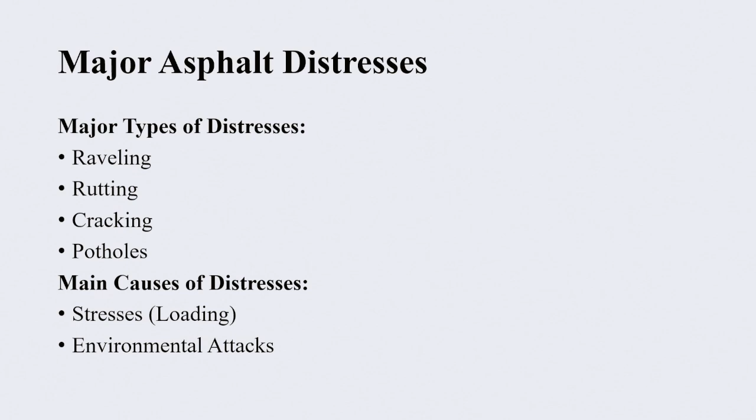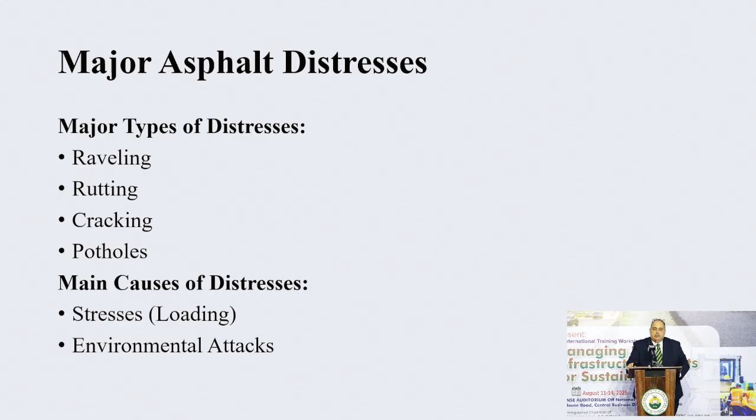It is regarding the parameters impacting our roadway network conditions. So I consider this to be as two presentations in one, so please follow up with me and pay a lot of attention. I will be a little speedy in here because I'm first presenting some of the major distresses that are facing our roadway network, and then I'll talk about the major causes of these distresses. Then I will present how to form a team to assess our metrics, like risk assessment basically, and try to come up with what we call definitions for vulnerability and resilience for our road network.

Do you hear me clearly, or there is like some... I'm not sure what is the source of this noise, but

So first comes, there is a lot of these distresses that could impact the condition of our roadway network. I have taught this class in multiple countries. I've made this training. I spoke with Ministry of Transportation employees, whether talking about my state, North Carolina, or the federal government and Turner Fairbank in McLean, Virginia, in the United States, or through the Ministry of Transportation in Kingdom of Saudi Arabia, or RTA, Roads and Transport Authority in Dubai, Ministry of Transportation in Egypt, MOCA, or Ministry of Construction and Housing in Iraq, and Ministry of Transportation in Bahrain.

We kind of brainstormed what are the main problems. And I asked everyone to give me a list of 3. Basically, they came up with a list of 4. These are what we're gonna see on the board, starting with raveling. So basically, raveling is everywhere across the globe. It could be a localized or a widespread raveling. Both are happening for the same reason. The only difference is time and level of traffic. Once raveling starts as localized, give it some time, some more traffic, hot weather, sun rays, and it will start to widespread, so convert from the left-hand side to the right-hand side picture.

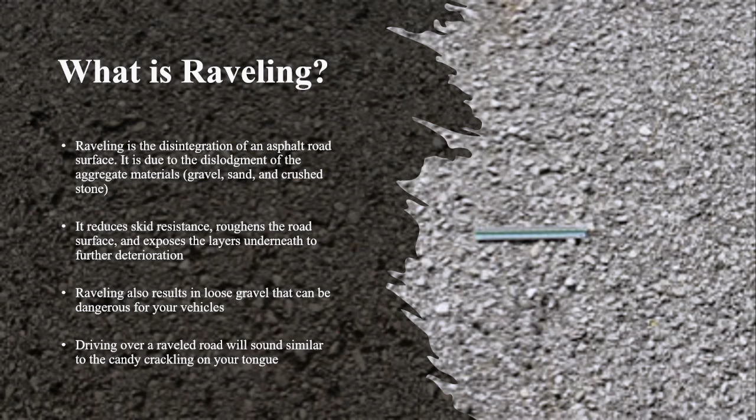However, with time, with use, with sun rays, UV, with abrasion and friction because of braking forces and the friction with car tires, the asphalt starts to convert from a flexible to a brittle material, and dislodgement happens for this aggregate, which we call raveling. That could be low, as on the left-hand side, or medium, as in the middle, or high.

Now, why do we classify? They are all the same type of problem. However, if we have low raveling, there is a specific type of preventative maintenance that we will talk about in a couple days. It's called the fog seal, where you basically spread a layer of emulsion, asphalt emulsion, only to protect or to prevent it.

If it's medium, then we do slurry seal, which is the same layer of emulsion, but with fine sand added to it. Now, if it reached a high level before treatment, then fog and slurry seal are not going to work, so we do chip seal, where you do slurry seal and then you add a 1/4 inch chip aggregate or coarse aggregate and compact it inside the hot slurry seal, to form what we call the chip seal and fix it.

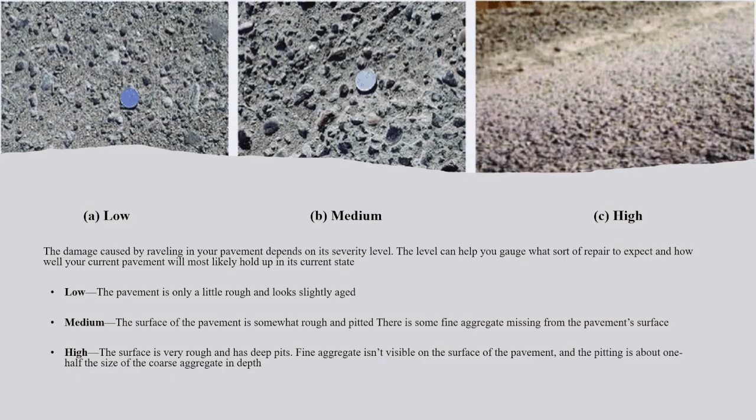So basically, by definition, all are the same type of problem. However, the mitigation or the preventative action depends on what level. That's why we classify into low, medium, and high levels for raveling.

Now, causes for raveling: one thing, it's a poor mix design. If the mix is not well designed, if the asphalt content is dropped, the binder content is not adequate, if the temperature of placement is not adequate. That problem happens big time in the United States because of the really cold weather. So sometimes the contractors venture and start placing the asphalt not at the appropriate temperature. That's why now there is a major use for what we call warm mix asphalt. I'm not sure if you use warm mix in Nigeria. It's about 50 degrees less than hot mix asphalt, and that could fit well with colder temperatures.

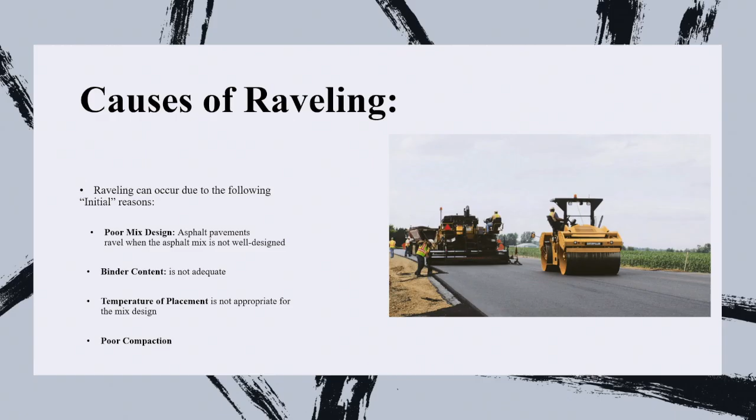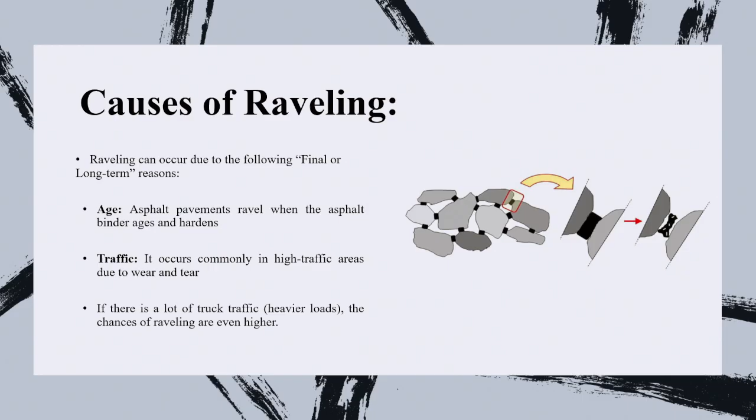Also, poor compaction by the contractor can result in the raveling effect. Now, if everything is good, raveling is still going to happen, but after a longer period, because of age. Just like our human cells age, asphalt ages. Once it ages, its flexibility is gone, it starts to acquire that rigid or brittle nature, then the dislodgement of coarse aggregate happens, and raveling starts. Traffic itself is capable of inducing raveling because of the friction and braking forces.

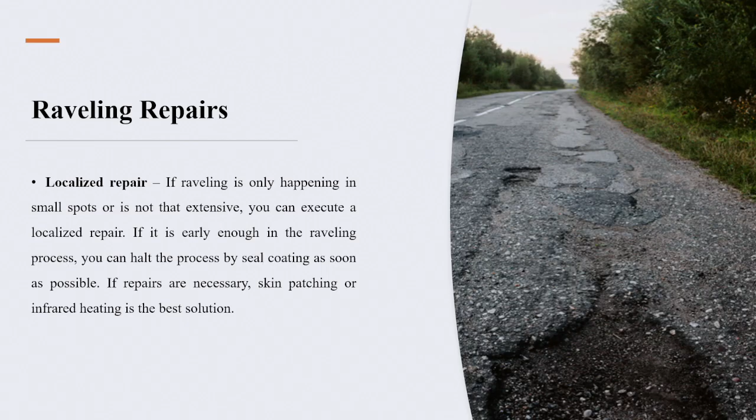Now, what can we do for raveling? Basically, if it ever happened and there was no preventative maintenance, then localized repair. And we will also talk about multiple ways, going all the way to mill and fill, full depth reclamation, or ultra thin bonded layer. There are lots of ways raveling can be taken care of, or preventative maintenance, as I just said: fog seal for low raveling, slurry seal for medium raveling, and chip seal for heavy raveling.

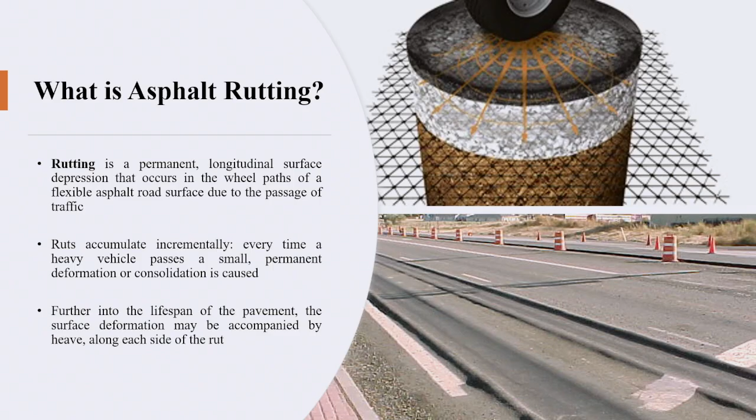The second comes rutting, and I mentioned rutting briefly before the break. It's basically permanent damage that happens due to deformation parallel to the traffic direction. It starts small, like a fraction of an inch, and it can extend up to a few inches, and this results in traffic impediment, and it could even go all the way until an accident happens.

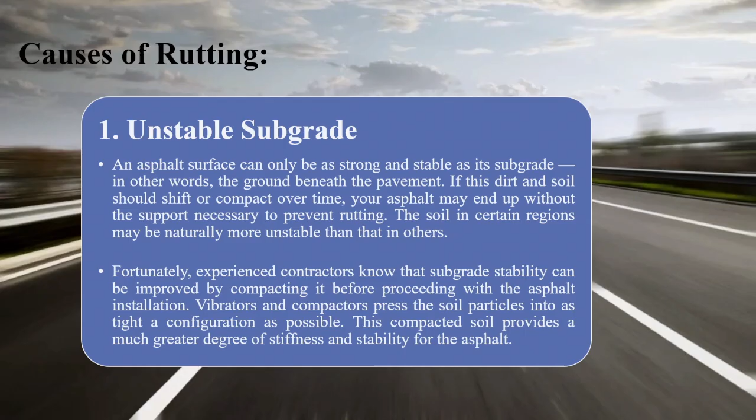One thing for rutting, it could happen bottom up or top down. Bottom up could be unstable subgrade. That could be because of the nature of the soil that you have, or because of poor compaction done by the contractor. Insufficient sub-base thickness.

Now let us agree on one thing. If you apply any vertical pressure on soil, it never goes vertical. It has a tendency to go at an inclination, right? So that inclination makes the footprint of the force increase as you go down. The increase in the area where the force is applied means the stress is reduced, because stress equals what? Force divided by area. The higher the area, the denominator, the smaller the value of the stress.

So if your base and sub-base are not thick enough, what's going to happen? By the time the pressure of the vehicle reaches the subgrade, it is concentrated on a smaller surface area. That smaller surface area will result in a higher value for the stress, thus the subgrade will not be capable of supporting that stress.

Now, what we can do is either increase the thickness of the subbase or improve the bearing capacity of the soil by partial replacement, full replacement, or even, right now, there is the application of geosynthetics and geogrids. I'm not sure if this is a common technology in Nigeria, the geotextiles or geogrids. Not very common.

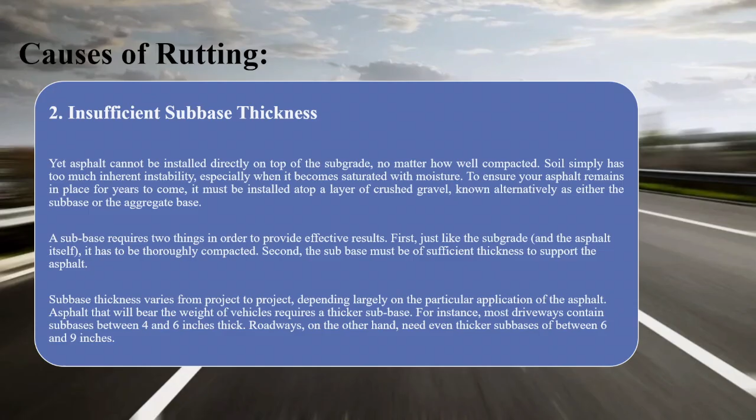Poor mix design, this is for top down. Basically, a couple things we have to watch for. One thing is the percentage of the fines should not be that high on the wearing surface mix or the asphalt concrete mix. The reason for that is the bigger the aggregate, or when you use lesser fines and a higher percentage of coarser aggregate, there is a bearing force between the aggregates together.

In the Gulf area, they call this an open grade mix. In the US, we call it SMA, or stone matrix asphalt pavement. I'll talk also about this when we come to different types of designs. SMA, or stone matrix asphalt, is very commonly used in the US, where you increase the percentage of coarse aggregate, regardless of the nominal maximum size you are using, but you increase the percentage of the aggregate that is classified as coarse.

So there is a bearing force between the aggregate particles, so not all the stress is conveyed through softer points within the wearing surface. It is through the bearing of the coarse aggregates on top of each other. Now the downside of this, if you have temperature fluctuation, coarser aggregates tend to expand and contract, so you induce cracking. That is why the essence or the theory of balanced mix evolved.

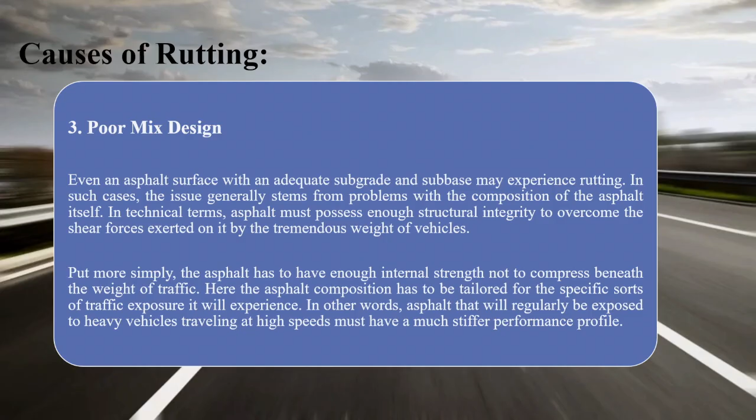You have to increase the percentage of coarse aggregate to a limit that is good in fighting ruts, but at the same time it's not too much to the point that cracks evolve. Usually you have to balance between the ruts and cracks. That is the meaning of the balanced mix design, which I will present a couple slides on. This is a step further for the Superpave mix design in the US to minimize the effect or optimize, hold the stick from the middle, as we say.

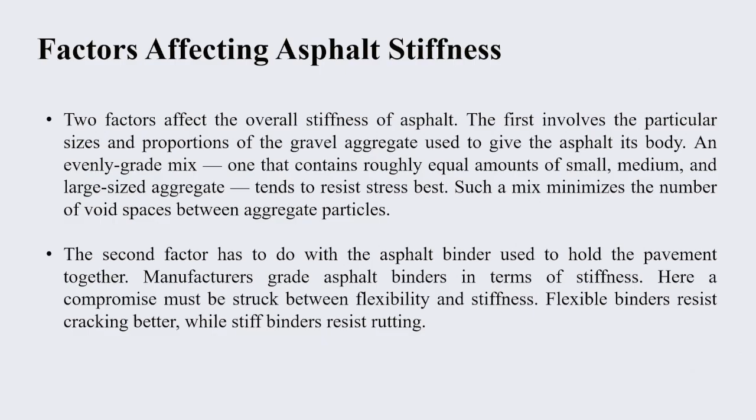So the asphalt stiffness basically stems from the particle size and the proportion of the gravel. So basically one has to watch for this. Again, we're having a session tomorrow. An introduction after lunch today will be about this session for Superpave. Then my colleague from Ghana will be presenting early morning tomorrow about Superpave mix, and he will explain in detail about this. I have also a few slides about how the overall stiffness of the asphalt is being impacted by the gradation of the aggregate, and also the percentage of the asphalt binder within the wearing surface.

Now, how to fix rutting? Unfortunately, once rutting starts, it's a never-ending story. It starts at a fraction of an inch. Again, it happens in the longitudinal direction, parallel to traffic. But once it starts, it will proceed, whether it's because of bottom up or top down. So to fix this, if it is bottom up, then you have to come up with a solution for the weaker capacity. Some countries, I have to mention this, in Iraq, they figured out that shifting from flexible to rigid pavement is going to help with this problem.

Anybody knows why? Why would rigid pavement help with bottom-up rutting? So smart. Yes. The higher rigidity of the surface makes it act exactly as a beam. So basically, you are creating a surface between your subgrade that receives the stress and the vehicle loading, the tire footprint, right?

So instead of applying the tire footprint through the wearing surface, then the base, sub-base, straight to the subgrade, you are having a load applied on the beam, then it is acting on a huge footprint. It's almost a portion of the slab of the rigid pavement between the two joints. So you are applying the stress on a mega size area or footprint. So the subgrade is feeling minimal impact because of the heavy truck loading in Iraq, because they failed to convince the truckers that they have to abide.

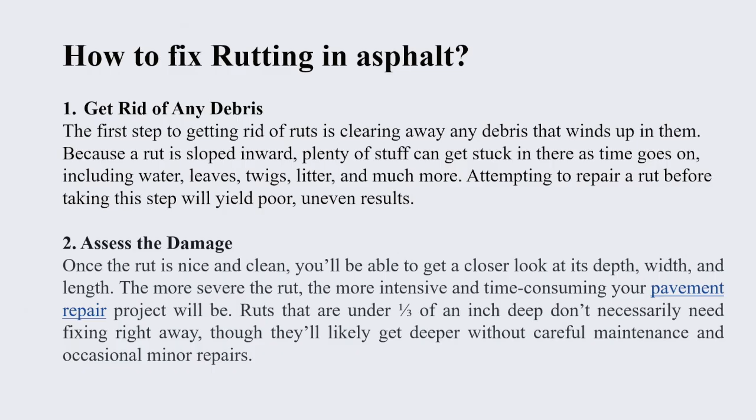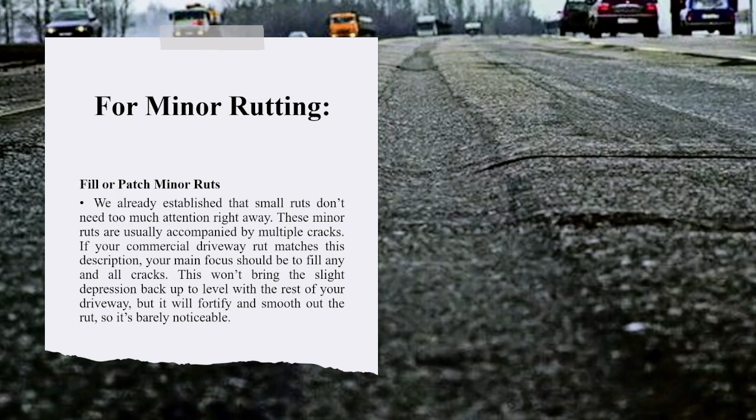Now, to fix the rutting, first clearing the section, getting rid of the debris and the damage assessment. Now, if it is minor rutting, patching or filling could be more than enough. For deeper rutting, basically it is resurfacing. Now, keep in mind one thing.

Oops, sorry. If the rutting has happened as a bottom up, fixing the top layer will never be the solution. It will work for a few months, and then it will happen again, because basically you are treating the outcomes, the symptoms, right? But the main cause of the problem is still there. Whether loads are high, subgrade capacity is poor, compaction is little.

So there is a new technology here. Well, either you can do reconstruction, or there is something called the FDR. I'm not sure if it is done in Nigeria, full depth reclamation. Yeah. Okay. So we started it. It was okay. It was fine. You used it where? On the road, Mokwa Tegina Road.

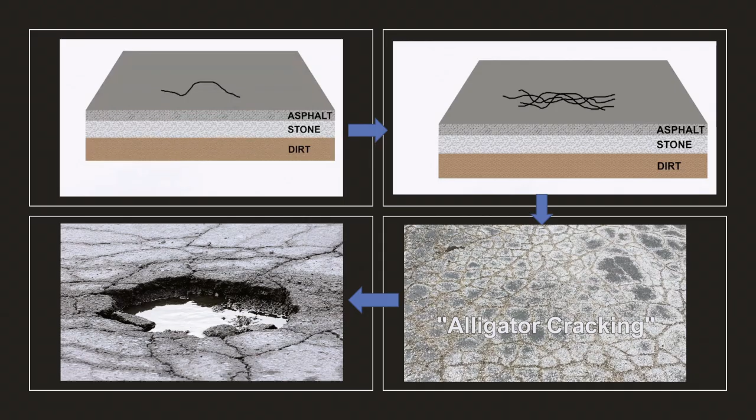And then if untreated, whether high water level or freeze-thaw or frost heave or continuous traffic, the dynamic impact would result in popping portions of these alligator cracks to come up with what we call the potholes. Okay?

So this is the first part of the presentation. I'm trying to monitor the time as I go. The main part, whether talking about bottom-up ruts or top-down ruts or any type of cracks, including alligator cracks, or potholes and/or raveling at any level, low, medium, and high, these are what we consider the 4 main enemies for any roadway network. And here I'm specifically talking about asphalt or flexible pavement or asphalt concrete pavement.

So in order to minimize or mitigate the risk, we have to first go through the steps that are available on the board. I cannot see clearly, but can you guys read step 1 through step 6? It is how to. Okay, step 1, apply a climate and ecosystem lens.

Yeah. Thank you for reading. I know the steps, but excellent. From my side it's very blurry when I look at an angle, so I was not sure if it is clear from your side.

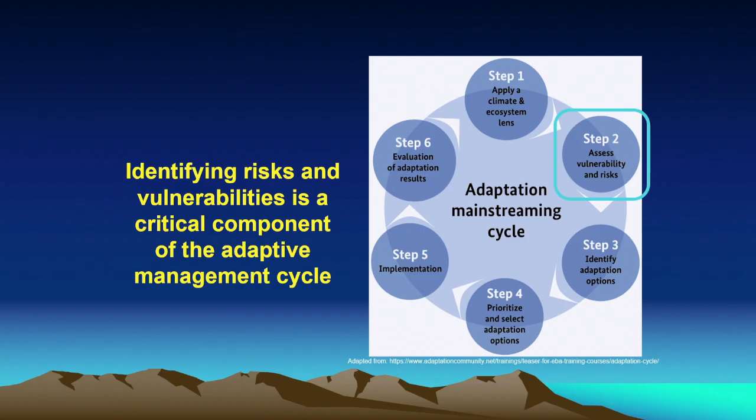So this is step number 4. Step number 5 comes the implementation, and then step number 6 is you evaluate, and then here you go. This is the cycle we have to go through.

Now on the assessment approaches, I have included here some of the organizations under which these global policies are being adopted. So in the US, that's what we go with, FHWA, the Federal Highway Administration. In Canada, PIEVC. There is also the USFS in the United States. In Europe, they have the ROADAPT. In Africa, there is a ReCAP. I'm not sure where. I know in South Africa, they use the ReCAP. Not in Nigeria? Okay.

So basically, the first step here again is to create a database. Whether the database for inventory you have, the type of projects, that's why when I presented the earlier presentation early in the morning today, the first questions I asked: what is the road network? What is the size? How much of the roads are made of asphalt? How many kilometers are made of concrete? And then how many bridges do you have?

I have to give the United States a huge credit. If you Google the NBI, National Bridge Inventory in the United States, it will spell out a mega spreadsheet that tells you every piece of information about every single bridge in the United States. 623,000 bridges. It will tell you spans, structural system, material of construction, when it was constructed, every detail, thicknesses of bridge decks, the type of pavement, type of guardrails, the type of maintenance and preservation since it was constructed until today. So basically, same on roadways.

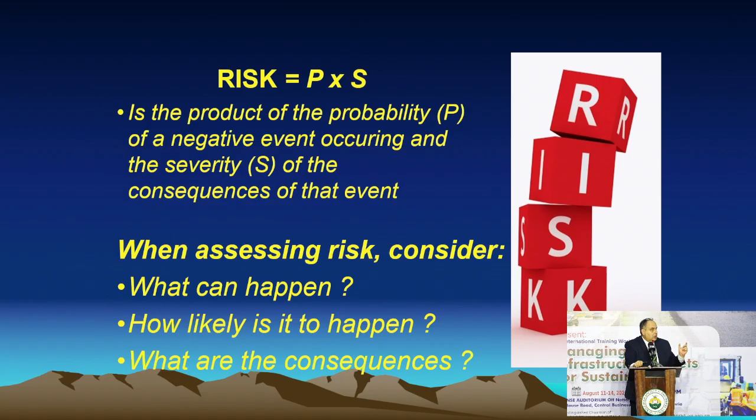Now, I've been talking about big words like vulnerability, risk, etc. So let's see how we can add the risk into the matrix of assessment. By definition, risk is the severity of a problem multiplied by the probability of the problem: P multiplied by S. You can have severe risk, let's say from an earthquake of 9 or 8 on the Richter scale, but what's the probability of it happening? Almost 0. So when you define risk to take precautionary steps, consider how severe it is and the chances of it happening during the lifespan of your project.

So this is a matrix for risk assessment. Probability-wise, for the damage based on the risk: is it unlikely, like the first column, or possible, likely, or very likely? Then the magnitude of the risk. What do I mean by risk? It could be wind, tsunami, earthquake, wildfire, sinkholes, volcanoes, tornadoes, anything. Major, moderate, or minor. A combination of these with very likely, likely, possible, and unlikely generates this matrix from very high risk all the way to very low risk.

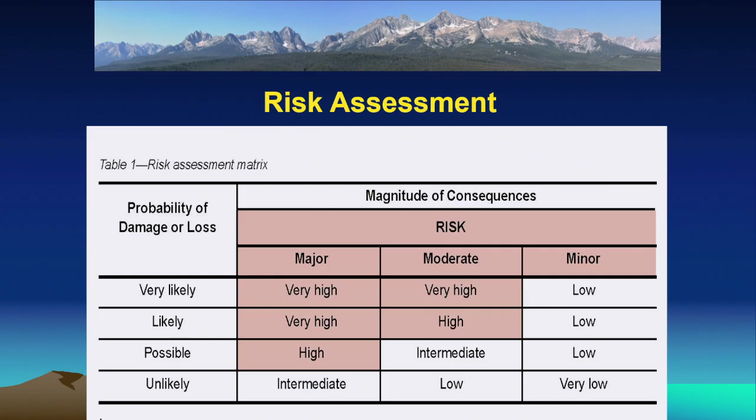Now, why do we keep this in mind? As I mentioned, when the ASCE grades the quality of the inventory as A, B, C, D or F, they have to consider the resilience and the vulnerability. Basically they have to account for factors that could result in damage. Did this damage happen? No, but they are talking about the probability of it happening. To quantify something that didn't happen, they give it this assessment: how likely will it happen, and if it happened, how big or small is its impact?

And that leads us to this slide which I showed earlier. The load here could be extreme temperature, a tornado, tsunami, earthquake, volcano, anything. The chance of having the load higher than the capacity is how vulnerable your structure is. The chance that your capacity will be higher than your load is what we consider the resilience. You already control the capacity. You designed the bridge, the pavement. You picked the material.

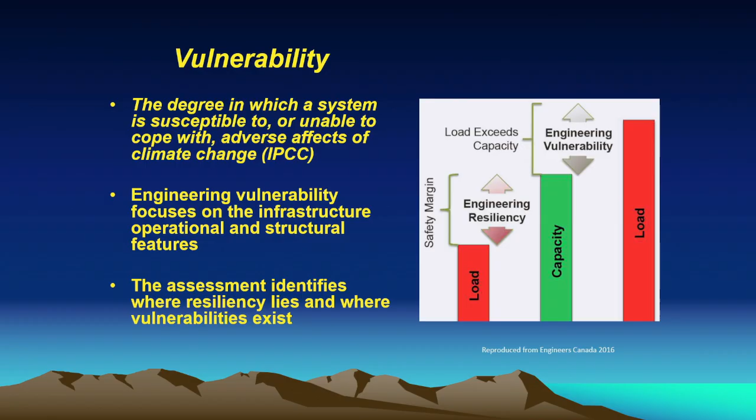Should I do it flexible or rigid? If rigid, Portland concrete or roller compacted concrete? What gradation of the aggregate? What percentage of binder? How thick is your sub-base and base? How much compaction, 95% or 100% for my subgrade? All this you control, and that results in the capacity. Then based on your studies, including environmental parameters, you can define that red one, and come up with how vulnerable or how resilient your project is.

Now, to identify the risk, always keep in mind that you have your structural component, and then you have your climate parameter. If you don't have an interaction, there is no risk, right? The problem is where you have an interaction between the parameters acting on your project and the stressors.

Interaction between your project or the component of your project, your roadway or your bridge deck or your bridge girder, with the type of stressor you are considering, which here I'm calling the climate parameter. So the plan or the roadmap to fix everything or to mitigate. Remember, you are trying to fight an enemy that you cannot see. Right? We're not here talking about general situations. When you talk about vulnerability and resilience, these are parameters that you are trying to assess, you are trying to evaluate, and you are trying to mitigate the chances of what they're going to impact, what they're going to do to my project. So first thing is, again, project scope and planning.

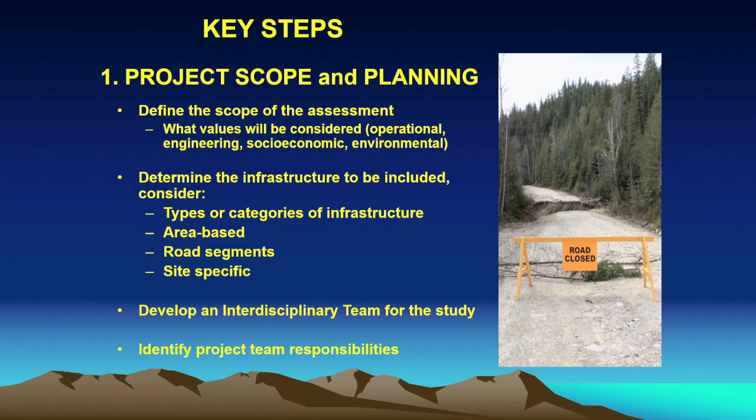What is the type of the infrastructure I'm talking about? And again, you can classify according to the type, you can classify according to the area, you can classify according to site, or the criteria you are using for your classification. Second thing, formation of interdisciplinary team. Remember, the problem is not only a materials problem, to have a structural engineer or a materials engineer. In the US, when we do this study, you have to consider having geologists in your team. You have to consider those working on the weather forecast. Sometimes we have to have chemists because of the possible chemical reaction on the long term. So there is maybe mechanical people for fatigue. So it's a multidisciplinary or interdisciplinary team that has to be considered.

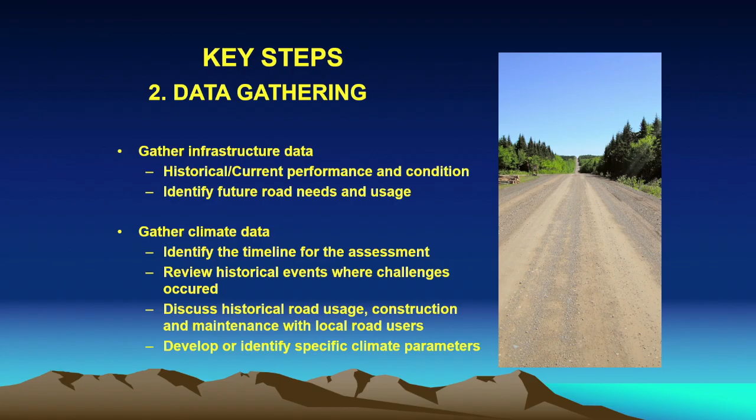Then data collection, and we'll have a session on this, starting from the structural or the infrastructure data, loading data, climate data. In the United States, if I remember right, there are 5,000 points for data collection that are only working for the environment, to monitor the weather, the temperature up and down, or maximum and minimum, dew point, humidity, sunrise, sunset, amount of rain, percentage of snowfall, thickness of snow anticipated to fall, etc. Then, you can think of what to include.

Now, I'm here using an example of LVRs, like low volume roads. And why do I include the low volume road? They are the most vulnerable highways or roadways in the United States. The reason for this is the money that you use in maintenance or new construction or rehab comes from two sources. Number one is gas tax. I'm not sure if you have the same thing in Nigeria, but in the United States, they generate money from the gas tax. Every gallon of gas you put in your car, there is a tax that goes straight to the government to be used in road maintenance. Number two, toll stations, the tolls on the highways. These are the state funding. Of course, there is federal appropriation money that comes from the federal government to every state. However, from the state, it is the gas tax and the toll.

Think about low volume roads, where you have a couple hundred or 1,000 cars per day. How much gas tax you develop? Nothing. What is the toll? Actually, you don't construct tolls in low volume roads. So the funding is very limited. So unfortunately, they end up dumbing down, they lower the level of the specs for construction. You know, in some states, it's still dusty. Or they compact the dust and they have a layer of chip seal. So they don't have a sub-base and base. It's not pavement by the definition of pavement.

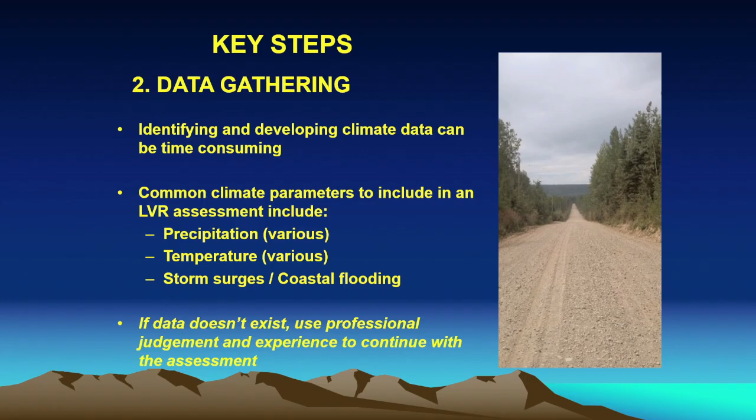So back to our point when we talk about LVR. So you have again to define what are the most important stressors. So one thing is precipitation. Because of how weak your cross section is, you have a lot of sinkholes, you have erosion on the section because of the rains, then the temperature, then storm surge. All these are very common problems that you have to collect for your LVR.

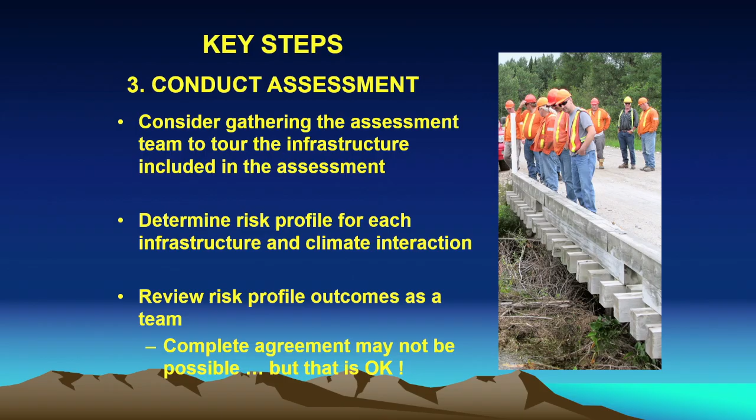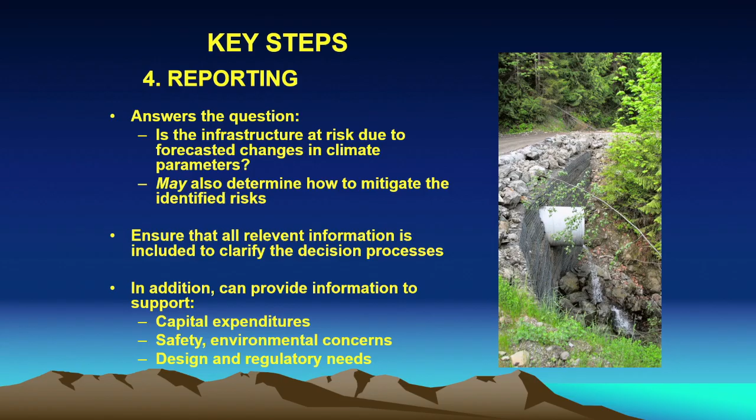Then you conduct your assessment. Basically, that chart for the risk, the probability multiplied by the severity, has to be conducted, and then they have to make the reporting, and based on this type of reporting, they can define what is the next step, what kind of capital expenditure is needed, what type of safety and environmental concerns should we have. Then, as the engineer here said, the design and regulatory needs. Maybe implementing electric cars, you have to do some sort of regulatory changes.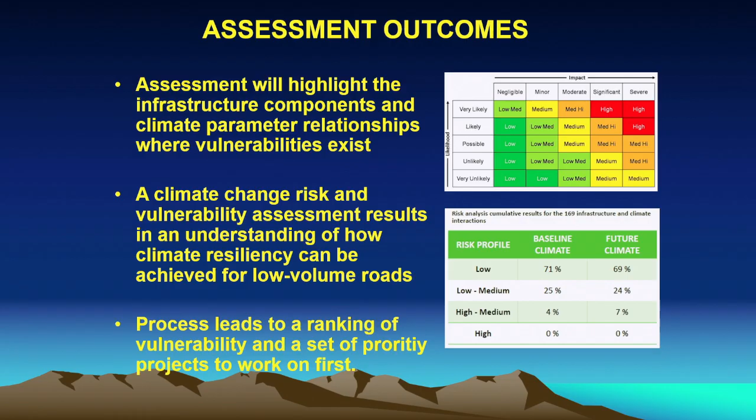So keep in mind the top one, which defines the severity multiplied by the probability, how low or how high the risk is, and the bottom one, which basically tells you the current or baseline versus the future problems you would anticipate to happen. Both have to be merged together so that you can come up with the right decision in the right amount of time.

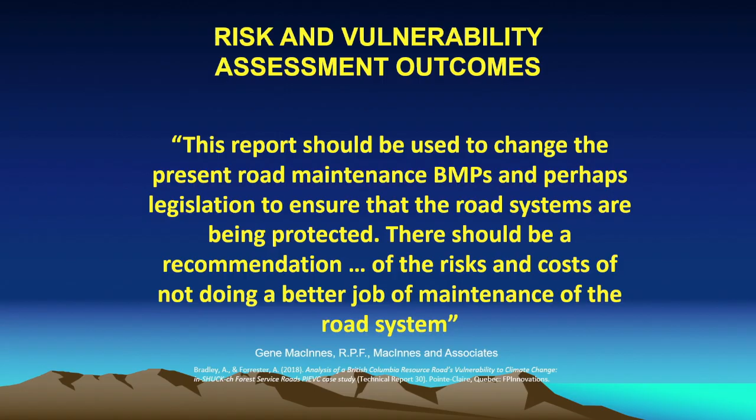I think I made it in time again. Well, we have 5 minutes actually. So, any questions? Yes, sir.